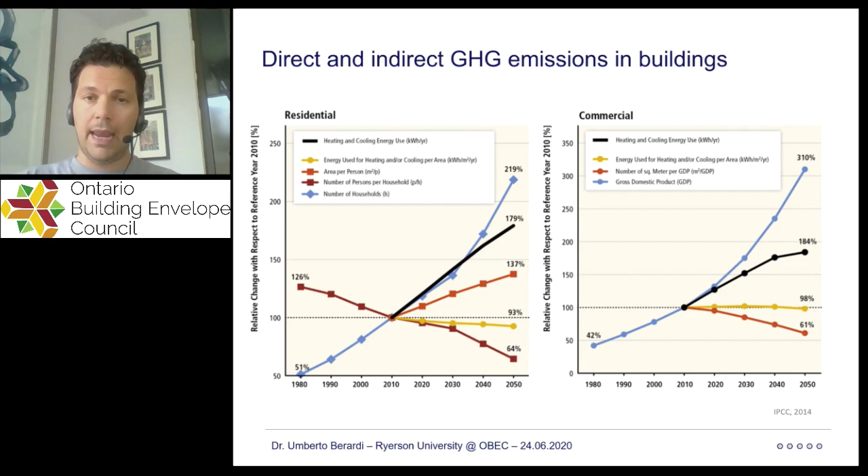It is a key imperative for building scientists to start understanding what we can do in order to behave and to act for building a better and more sustainable Toronto. Now, the huge majority of new towers that we daily see coming up in Toronto, across the entire Ontario and across the entire country, really offer us an opportunity to deliver a new way of constructing.

And today, I'm going to present you a bit of the sense of this scope, which is framed within my lab and within my group. The group is really a zero energy building group, and we often work on new materials. And today I'm going to present some of these new materials, and specifically speaking, I'm going to focus on some of the application of these new materials.

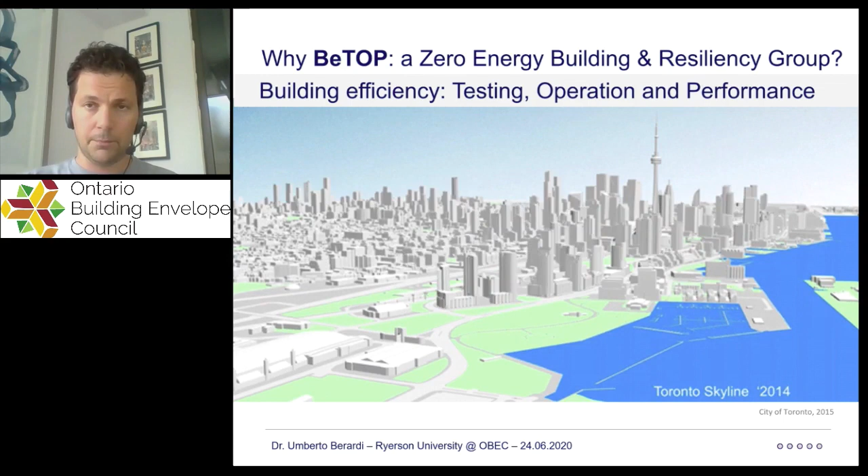So first of all, let me introduce you to the outline of today's talk. I'm going to speak about 5 different main categories of innovative products we can use in buildings. These 5 categories correspond to the 5 dots that you see at the bottom right of each slide. I'm going to start on phase change material, and I'm going to introduce the importance of building facades that have the capacity to accumulate some energy and have some thermal mass behaving action.

I'm going to then move into materials that have a very low thermal conductivity, and I'm going to introduce you to the world of super-insulating facades, which are not necessarily those facades that are 40 or 50 centimeters thick, that we often see in a lot of construction targeting sustainability, but are actually facades that in a couple of centimeters are able to guarantee an R value of 20, 30, if not more.

I will then move on to the world of new foams, and I'm using the foams to also introduce a key topic of today's talk, which is the embodied energy in building materials. Although it's not necessarily the focus of today's talk, I'm going to give you a snapshot of what it means for a material not only to be sustainable, but also to be able to be reproduced with a low embodied carbon.

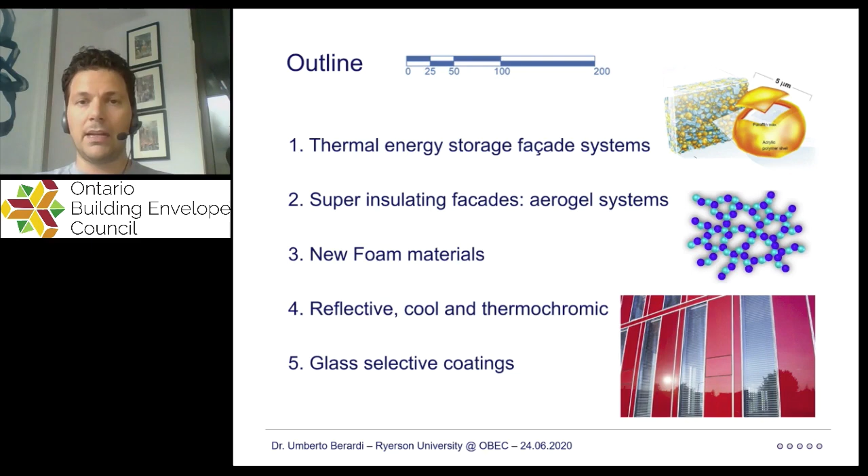Now, we all heard over the last few decades, if not even earlier, the critical importance of thermal mass. Some call it thermal capacity. The specific meaning of this is that we can have a building which is a lightweight construction and has oscillating temperature, as you see in this graph with the green wave that goes up and down, characterized by significant waves.

But if a building has a significant thermal mass, as you can see in this graph with the blue line, what you're able to achieve is an oscillation of internal temperature that is not really significant. And typically you also see a delay in the peak of maximum or minimum indoor temperature.

Now, from a strategic point of view, having a building with a high thermal mass is important, and it is particularly important in Canada, as well as worldwide. However, historically, building codes have not really paid almost any attention to thermal mass.

The construction sector has typically put in place codes that only target the R value, the thermal resistance of the enclosure, and have not necessarily given enough importance to the value that a facade with a given thermal mass may represent to avoid overheating in the middle of a summer heat wave, as well as the risk that we can suffer in the middle of a winter night.

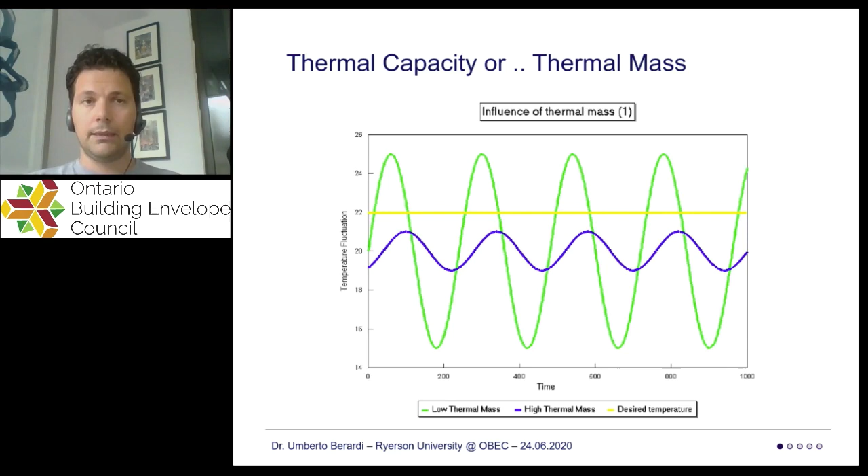Here we come in the sense that new materials may provide, without really giving you the weight of a brick wall or a concrete masonry unit wall, still the capacity to obtain a significant portion of thermal mass, so still a capacity to have thermal energy storage.

Now, if I want to characterize the possibility of a building, or in general a system, to accumulate energy, typically, historically, we are using sensible heat storage. This is the kind of heat storage that Casa Loma does in Toronto. You enter into a cathedral in Toronto and instantaneously feel that it's cool in the middle of a summer heat wave, because there is a huge thickness of stone that requires a lot of energy, and often a lot of time, before it can warm up.

If you do the same thing in a glass tower that we are building downtown, as soon as there is sunshine and you get into the mid of the day, internally you can easily reach 50 degrees Celsius if you don't turn on your air conditioning system. So sensible heat is an option, but clearly we can't build high-rise buildings with stones as in a cathedral—we can't afford the technology and cost of a meter-thick wall even with heavyweight construction. So a different approach is to use latent heat storage.

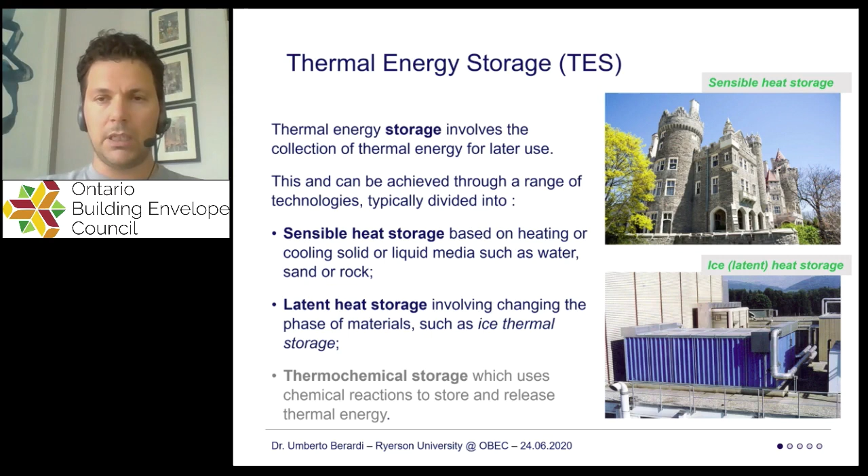The latent heat storage, often used in air conditioning systems—for example, those with ice storage—is basically a storage that uses the property of a material to change phase. This is actually the value of phase change material. Every single time we have an ice bucket and we require it to phase change from solid into liquid, or vice versa from liquid into solid, we really have a huge potential to store a huge amount of energy.

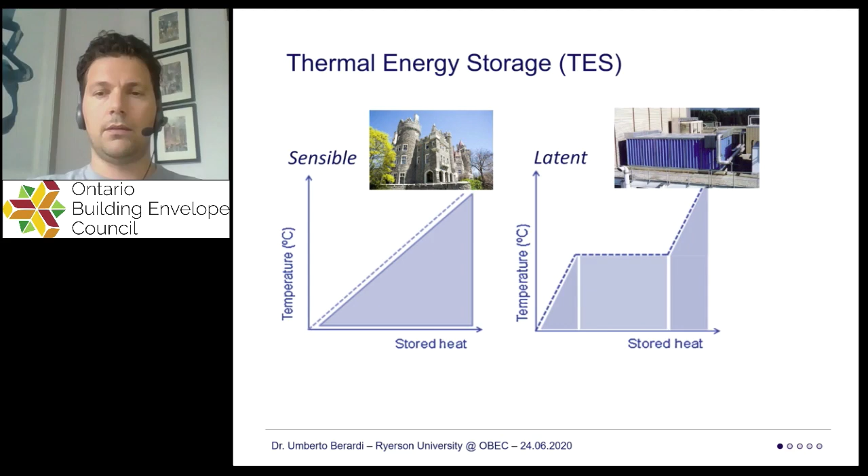I don't want to speak about the physics of the phenomenon, but if you follow me for one second and look at this glass of water with a bucket of ice getting into it, it's important to get the sense that the same energy needed for an ice pocket to melt is the same amount needed for the same amount of water to move from 0 to 80 degrees Celsius. This really gives you the value of why thermal storage is critical.

To break the bonds of a solid structure into a melted liquid structure, you really need to invest a huge amount of energy. And vice versa, if you want to solidify it back into that solid layer, you can really secure the potential of a huge thermal cooling energy storage.

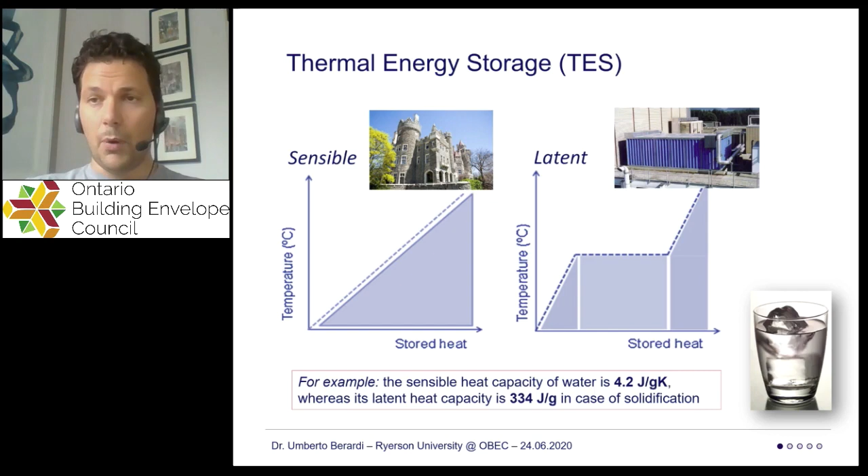This is possible with what we call phase change materials. Some of you may be curious about what they are—typically nothing more than a wax, or almost like water. We'll see in a moment that it's not really necessarily a pocket of water, but the principle is very similar to the material we typically use for candles. You have a material that is solid, and when it gets quite hot, it becomes liquid. This phase change is critical to act as a thermal storage with a huge thermal mass capacity for storing heat and avoiding our buildings becoming extremely hot.

Now, there are a couple of important aspects I need to remind you of. The first is that in the building sector, we want facades that are solid. Nobody is stupid enough to pretend that we want facades that can become liquid.

Phase change materials have always suffered the critical risk of being compartmentalized into plastic bags. Often in the past, in the 90s and early years of this century, people criticized these products because you could puncture these bags, and this could result in a leaking wall or a leaking false ceiling. But right now we have solved this problem, and I'm going to show you in a moment how.

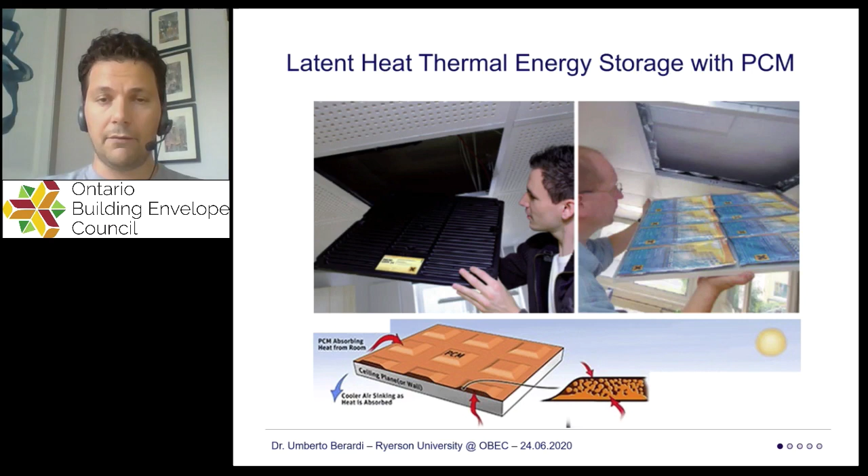The second element I want to make sure we're all familiar with is that although we often speak about phase change material using the singular word, in reality there are thousands of different PCMs. One critical element when it comes to thermal energy storage with PCM is to get a very good understanding of the different phase change materials you can adopt in your building facades. So let me introduce you to this huge family of products.

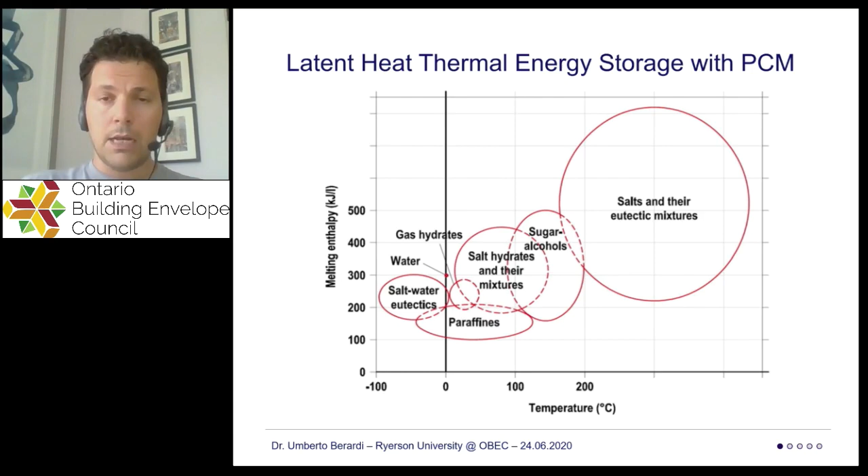Going back to the question about putting PCM in a plastic bag that can puncture and melt — the answer is no. I mentioned we discovered how to introduce PCM into buildings, and the process that is currently most common and best for delivery is by microencapsulating this PCM in a polymer shell.

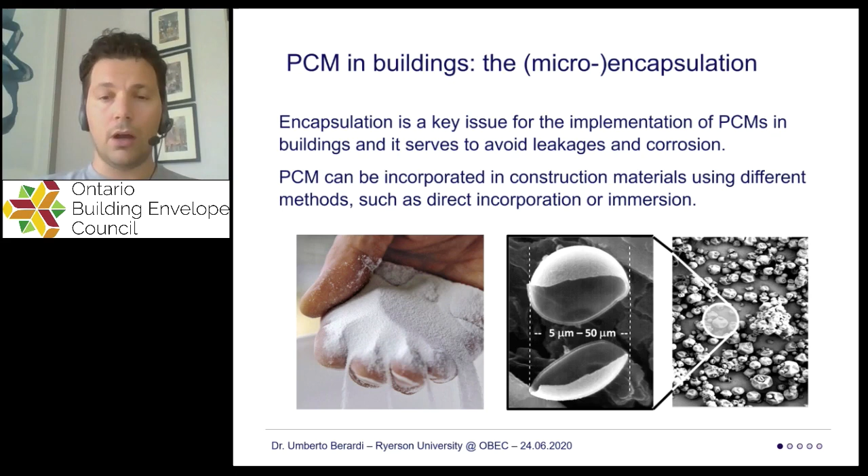So typically on the market you can find a lot of powders of PCM that are really surrounded by a polymer. At the end of the day, you're using nothing more than something that looks like sand. But if you zoom in with a microscope, this granular powder is really encapsulating a PCM in the middle. So the PCM can melt and solidify, and this process accumulates or releases energy, meanwhile stabilizing the internal temperature in the building, acting as your thermal battery — although it's lightweight and doesn't really increase the weight of your facade too much.

Now, these powders can clearly be made with a lot of different PCMs, so selecting the right PCM is critical. We've also been seeing a lot of new powders and new building products coming onto the market, as well as first attempts at monitoring thermal energy systems in some real buildings. I'm going to show you a few of these options in a moment.

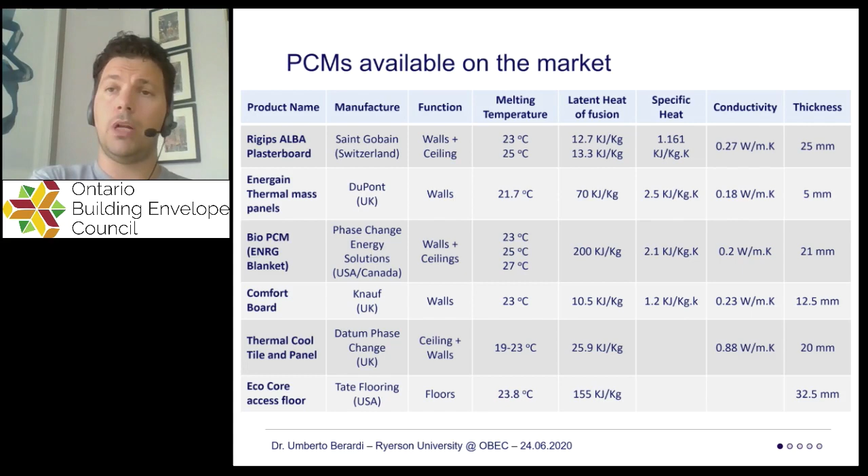But it's still better than nothing, and it's still a way to give a lightweight element in our building facades, such as a gypsum board, a thermal function - basically stabilizing the indoor temperature of your building. You may also start seeing in the fourth column that a critical factor is the melting temperature. I've selected products in this table with a melting temperature between 20 and 27 degrees, and there's a lot to say about why these are critical and useful temperatures. I'll show in a moment why these are typical temperatures we use.

Let me first give you another snapshot of the possibility to use PCMs in buildings, not only as a gypsum board, but also for concrete tiles or ceramic tiles in your flooring.

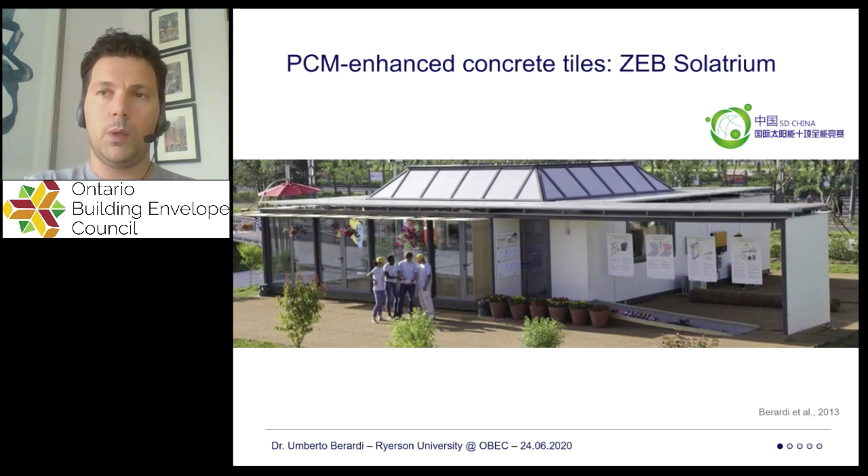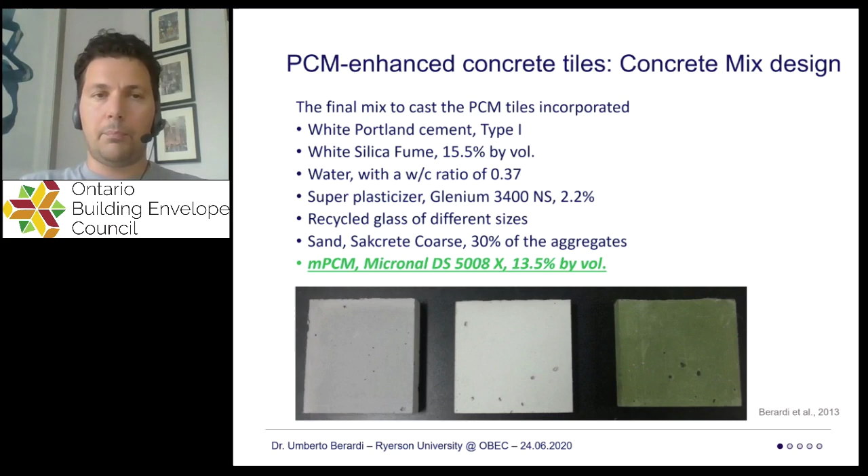The value of the PCM was in shifting the amount of solar energy entering the house, moving the maximum peak temperature from the middle of the day towards the night, where night cooling with a bit of cross ventilation was enough to cool down our house completely, passively.

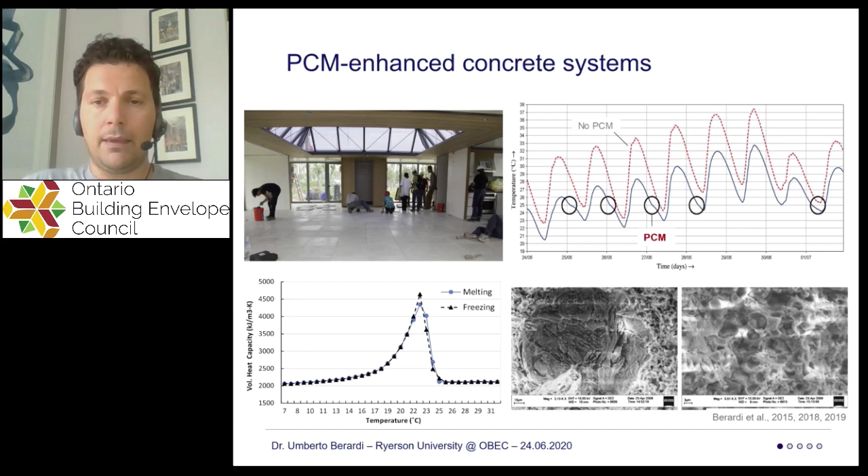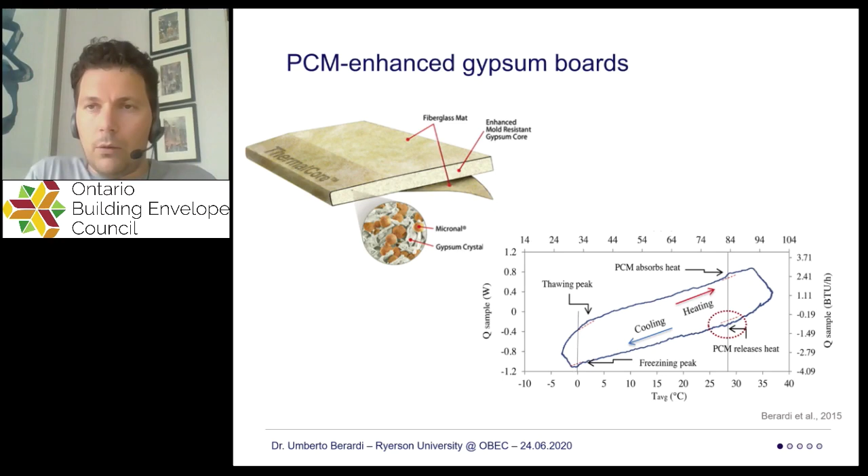Going back to those gypsum boards with PCM in the middle, they actually have value even for retrofitting applications, increasing the thermal capacity of an existing building by installing gypsum board with PCM. Here's a project done with a developer in Toronto three years ago, where we started monitoring units in one of his towers, installing this gypsum board with PCM in different units for different orientations, and using side-by-side units to do a comparative assessment of indoor conditions without any air conditioning system.

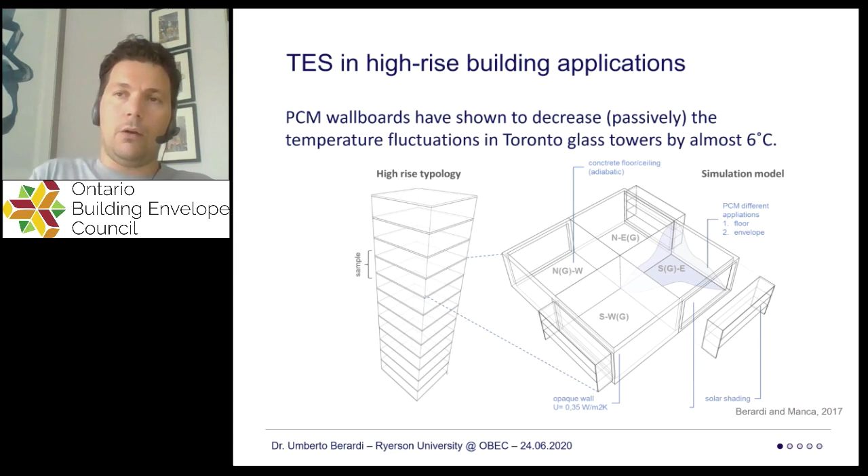Here you see a bit of the results, and I'm not going to go too much into detail - at the bottom right is the link to the paper published in 2017 with all these results. But basically for Toronto, a condition significant for us, we were able to obtain results that guaranteed a cut in energy demand oscillating anywhere from 12-13% up to 23%, and in some cases up to 30%, compared to the baseline without these gypsum boards.

A critical element I want to stress is that the orientation of the facades and a few other configurations are critical when it comes to these material-science-based materials. So they're not easy materials to use, but they can be particularly useful.

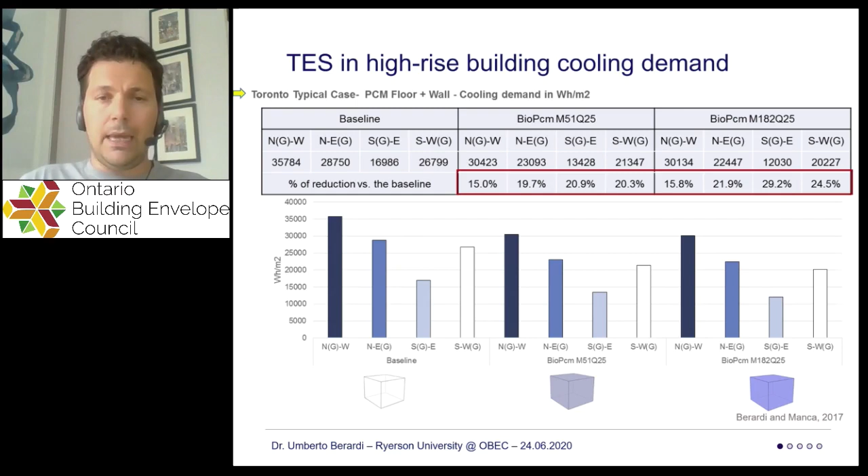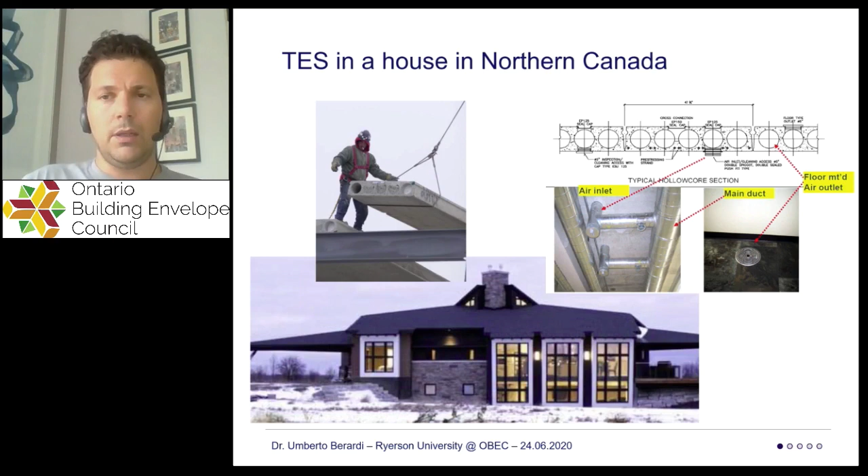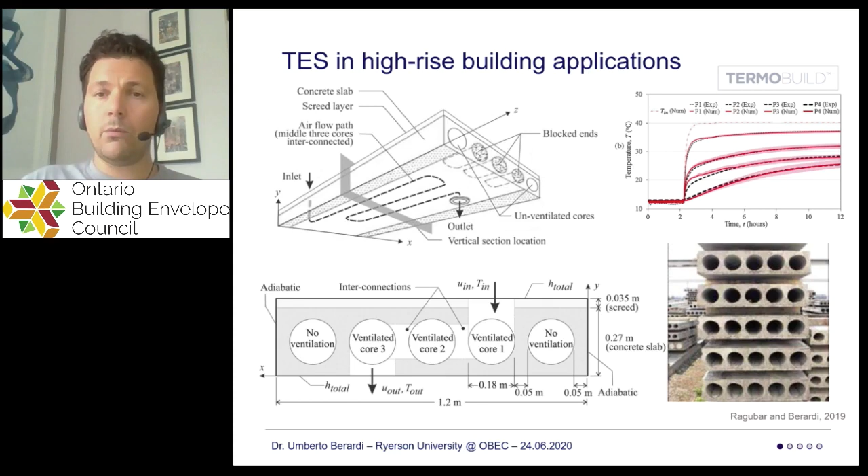Now, in this particular building, later on, we actually tried to do some research. More recently, with a local company, we've been coming up with a system that uses concrete blocks enhanced with PCMs, to give not just structural value to these elements but also a huge thermal battery capacity.

I told you before to pay attention to the temperature, and the reason is that PCM undergoes phase change transition, but it's critical to understand at which set point we typically use our thermostat. A good starting point for saving energy is having different set points for heating and cooling: cooling season temperature set point in the range of 24 to 27 degrees, and heating season from 20 to 22 degrees Celsius.

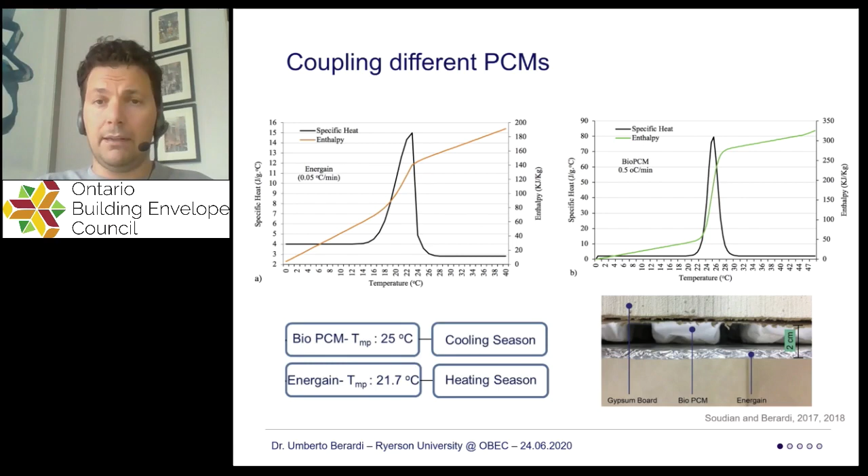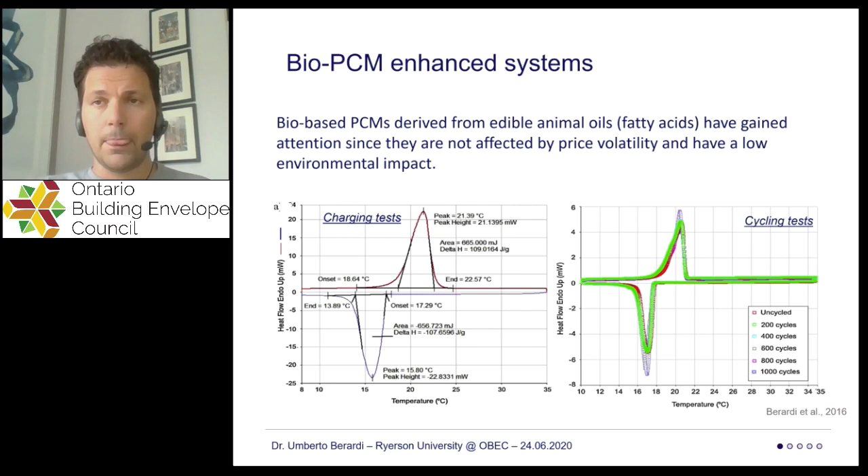So specifically, we've been working on coupling different PCMs, making sure we can use some PCM more effectively in summer and some more effectively in winter. We worked on bio PCM, which are quite common these days in North America because they have very low embodied carbon energy. They're basically waste from other industries, typically pork industry and other animal oil industries, and they have quite good properties for storing energy, so there's huge potential in these products. We've also been working with new nano PCMs, more technical and not yet close to market, but keep an eye out because in a few years these could become very popular materials.

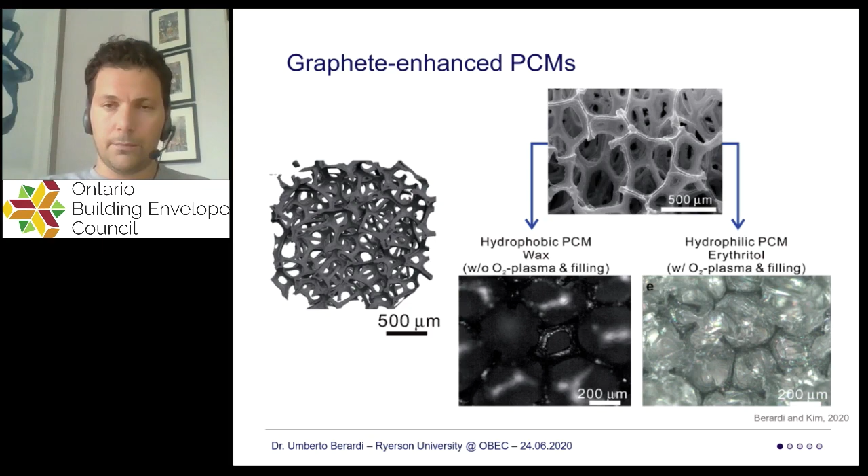Now, focusing on the second point of today's talk, since we only have one hour, I want to start introducing you to the world of super insulating materials. I started today's talk by saying that, unfortunately or fortunately, building codes have often put all the attention on the R value of facades, and not a lot of attention on the thermal capacity or thermal mass behavior of our facades.

So when it comes to the R value of our facades, we've seen over the last almost 50 years, since 1973 and the following codes after the crisis, that building codes have pushed us to design buildings with an R value that is bigger and bigger. One approach to address this challenge is by putting in thicker insulating layers.

While this is an option, and for some applications can be a good one, especially for an isolated construction where the thickness of the wall isn't critical, it's definitely not an option when you're designing a high-rise building in the middle of a metropolitan city. You cannot really afford the challenge of having very thick layers of insulating element.

So luckily, we have new products typically under the category of super insulating materials. I'm going to specifically speak today of aerogel, but there are also vacuum insulating panels becoming more and more common in the building sector, which often give us the opportunity to have very low thermal conductivity - materials with a thermal conductivity of about 0.01. That's a quarter of the thermal conductivity of fiberglass, meaning you can achieve the same thermal effect with a fraction of the insulation thickness you'd need using a mineral material.

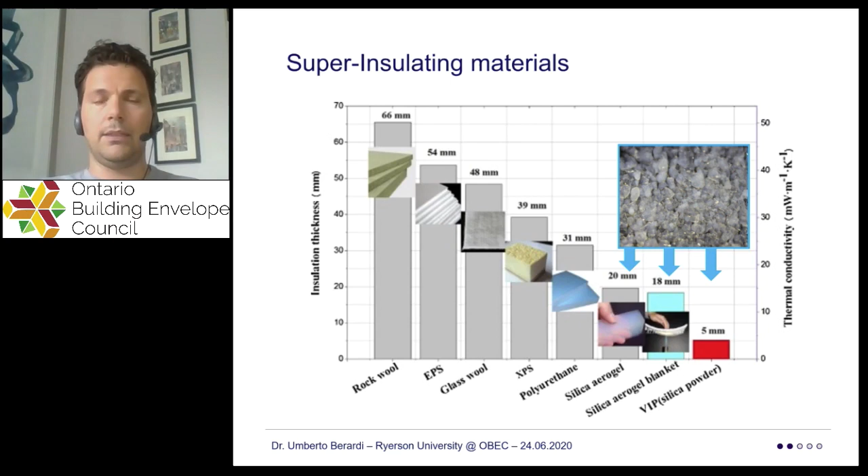But clearly, this new potential and these new materials still have some challenges that I'm going to present to you today. So what is an aerogel?

An aerogel is basically a material in which you try to eliminate all the liquid portion from a gel. They're often described as frozen smoke because in reality they look like frozen smoke. These are very lightweight materials - they only weigh a few kilos for an entire cubic meter. They have 95, 98, sometimes 99 percent voids, and a low thermal conductivity of only 0.01.

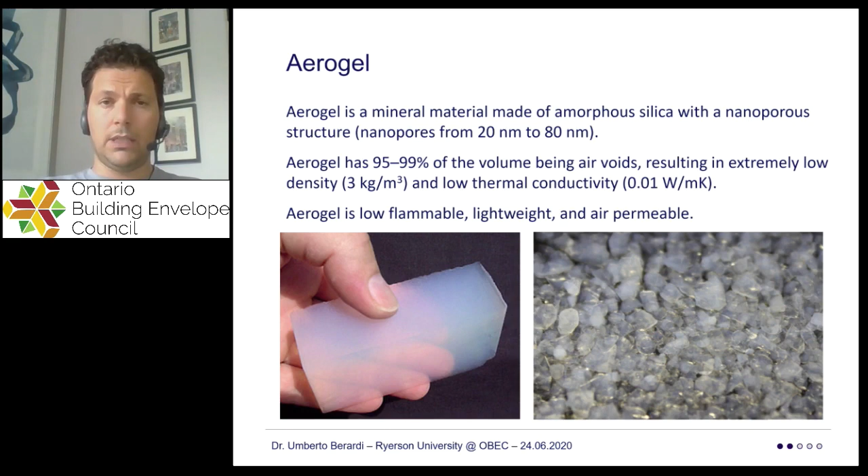So how do you typically obtain these characteristics? Through a chemistry process, which unfortunately makes this product quite expensive. This process starts from a silica gel, very similar to the gel you may be using in your hair.

So although we speak about a void, in reality we have molecules of air. Even in a closed cell foam, you still have a blowing agent present as a gas, and this gas moves around, carrying heat from one side of the material to the other.

Although we typically consider an insulating product fully solid, with thermal conductivity acting only through conduction, in reality within the cavities and voids of these products, convection is happening. And if the void is big, convection becomes more significant.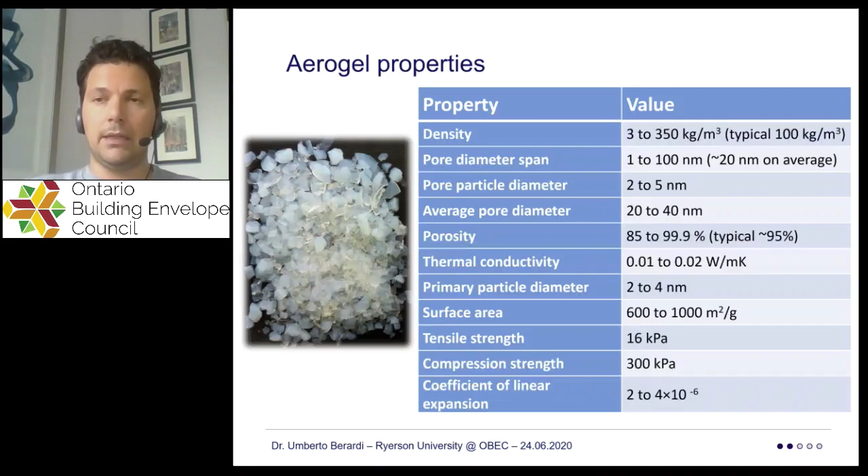Now, if you take this aerogel - and I showed you previously some of these aerogel particles - you can put these aerogel granules into any material typically used in building construction, like cement-based mortar or concrete. It's not necessarily an easy approach, because you're using a material with a still quite high cost into a material that generally has low cost, and you're putting a super insulating material into concrete, which isn't designed to have very low thermal conductivity.

But it is a good option moving forward - imagine that in the years to come we can start having concretes that also have low thermal conductivity. To be honest, we have already created concrete blocks with thermal conductivity in the range of 0.08, using mixes of aerogel and concrete.

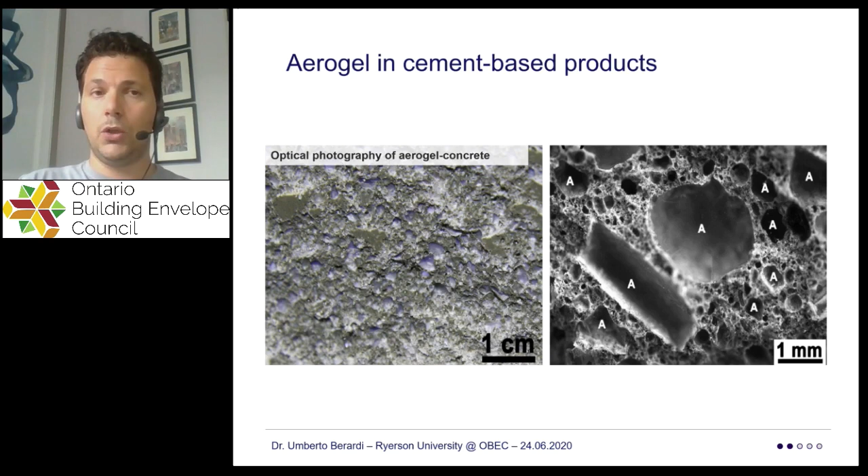More importantly are the opportunities to use gypsum boards with aerogel, blankets with aerogel, or plasters with aerogel. These are all products that can be created with thermal conductivity below 0.02 - values significantly lower than fiberglass - and they can be effective and useful in many different applications.

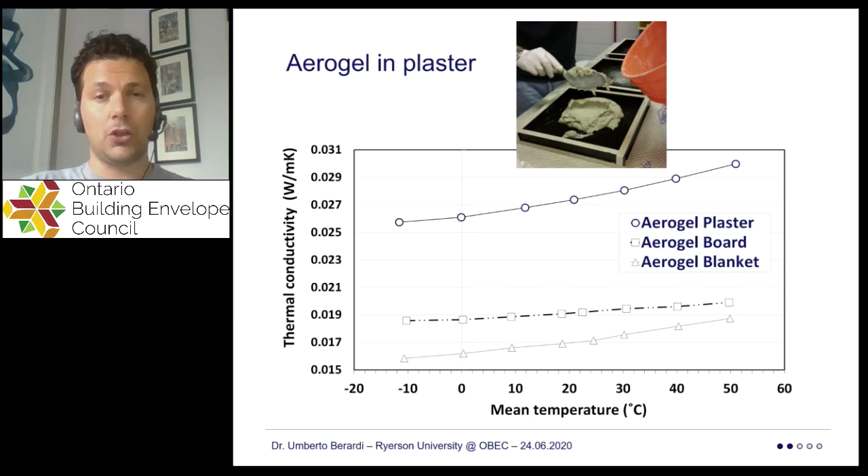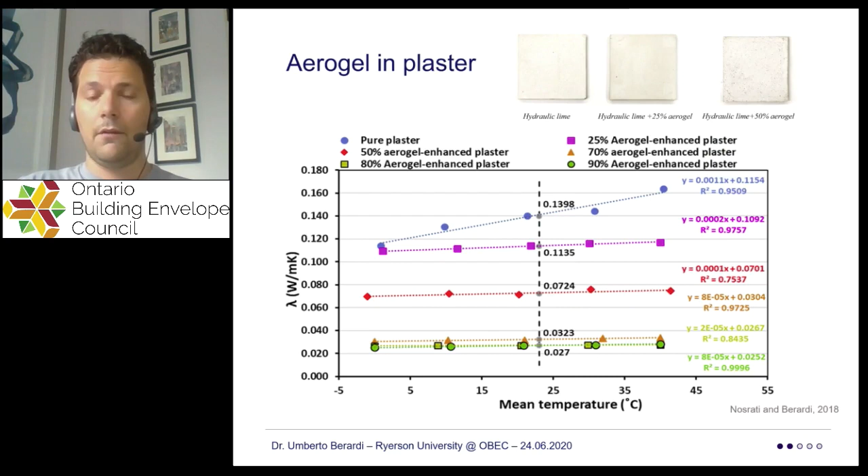They don't suffer a lot of aging, thanks to the fact that aerogel is typically water repellent. They also have good behavior when it comes to not getting wet easily, so hydrothermally they are good products.

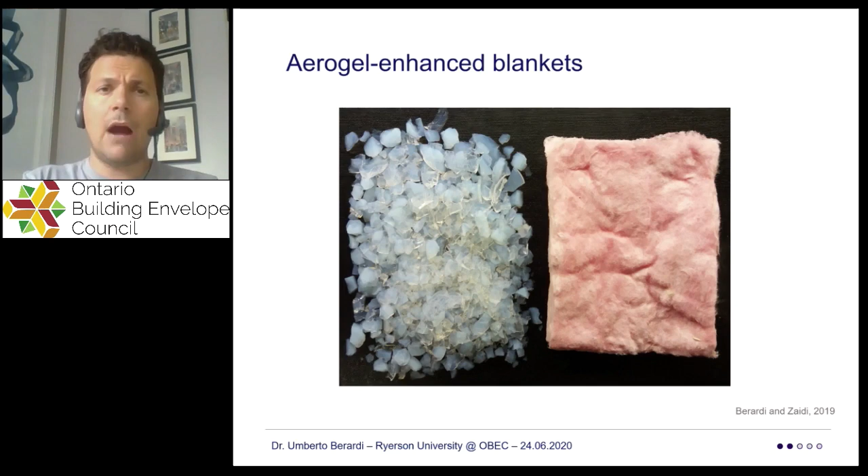In fact, aerogel-enhanced blankets have started becoming more and more common, for example, for protecting thermal bridges in specific construction typologies. What is an aerogel-enhanced blanket? It's basically a normal blanket, like fiberglass or any fiber material, into which the aerogel was put while still liquid, and then the liquid portion is evacuated.

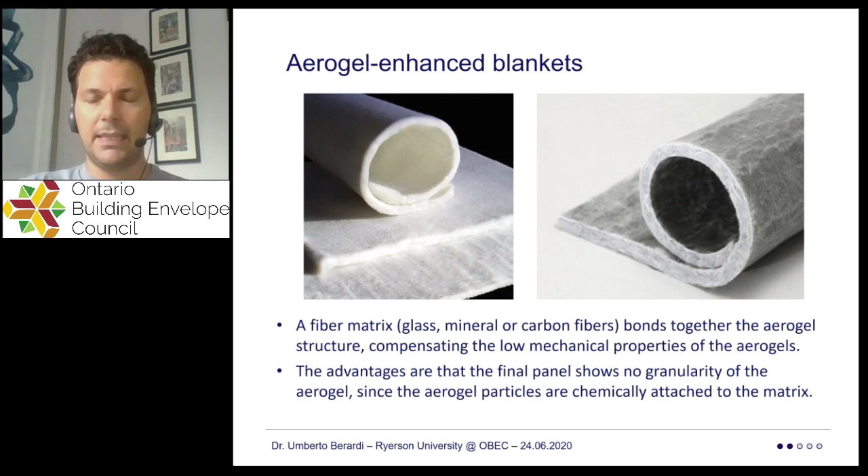And so the structure of the aerogel gets basically trapped within the bonds of the fibers.

These products are available on the market and produced by a lot of different companies - here you see some of them. More companies have started producing these products; some come from startups, others from more well-established companies. But one important characteristic of all these products is that their thermal conductivity is often not too far from 0.01 watt per meter Kelvin.

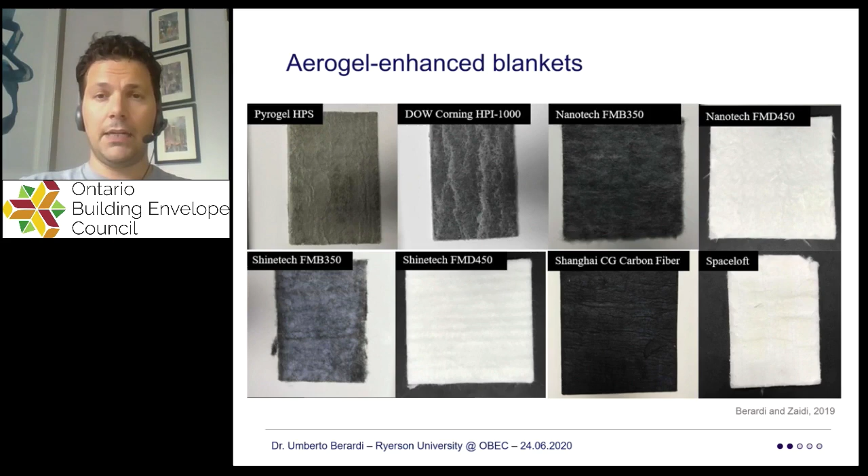So they have very good thermal behavior, and we've been testing this kind of material property in our lab. I need to confess that for some of these products, we found results that were basically higher than what those companies were declaring in the technical sheet. But without questioning that, these products have very low thermal conductivity compared to a lot of other products, and they are produced and sold as tiny layers of 1 centimeter, 5 millimeters, or 20 millimeters.

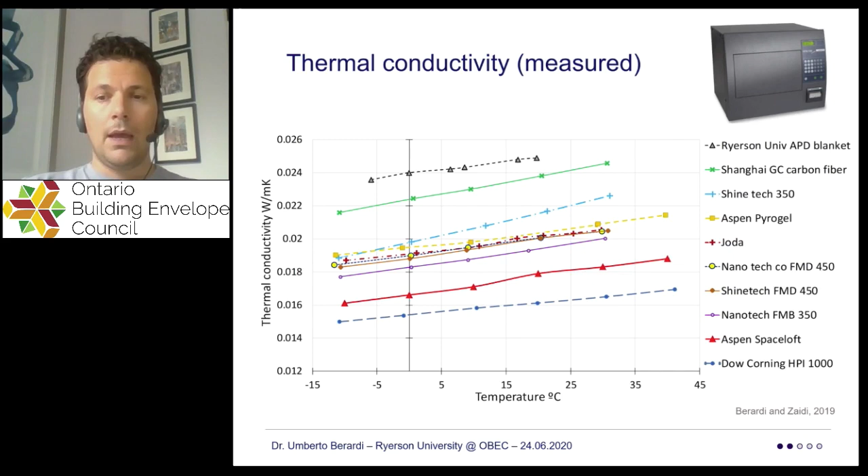You can use these layers a lot, for example, for protecting thermal bridges. As a matter of fact, just to give you an example, last year a student of mine performed some modeling of a lot of typical thermal bridge risks and issues in both concrete and steel construction.

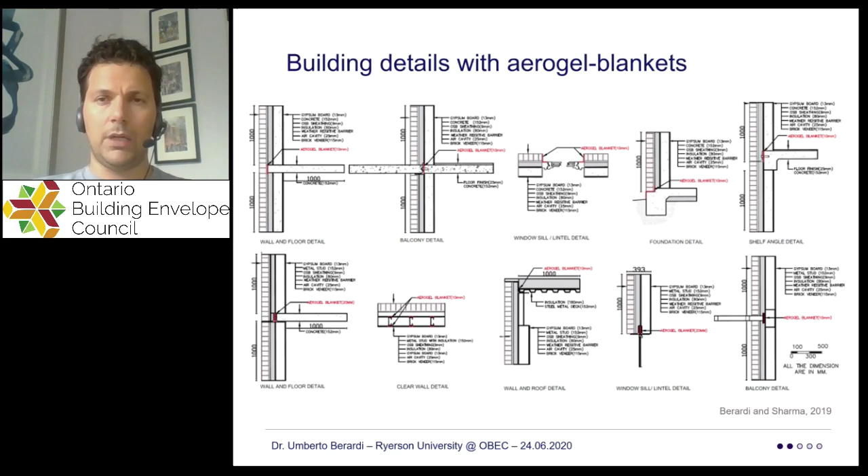And if you are interested in seeing some of the results, there is an article in the OBEC publication of last spring that really shows all the building details with aerogel blanket protection and without the aerogel blanket protection. So you can see, for example, a concrete balcony detail: by simply putting a 1 centimeter thick aerogel blanket, it avoids the traditional effects of the concrete balcony.

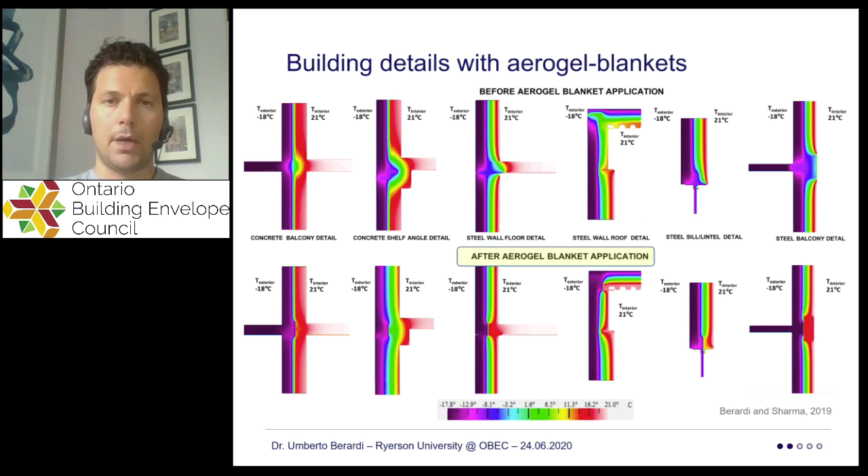Similarly, a concrete shelf angle detail will be resolved very nicely once you start protecting that kind of concrete element with an aerogel blanket, and so on and so forth. I don't have time to go into the details, but you have plenty of opportunity if you go to this Pushing the Envelope Spring 2019 issue to get a sense of the opportunity that aerogel blankets provide to us.

And specifically, we also used that opportunity to run some simulations of the potential value of extensively used aerogel blankets for protecting all the thermal bridges existing in both concrete and steel buildings across Canada, across different zones from zone 5, 6 to 7. And you can see that there are significant energy savings that in some cases can reach up to 20, 30 kilowatt hours per square meter by protecting all the thermal bridges with aerogel blanket.

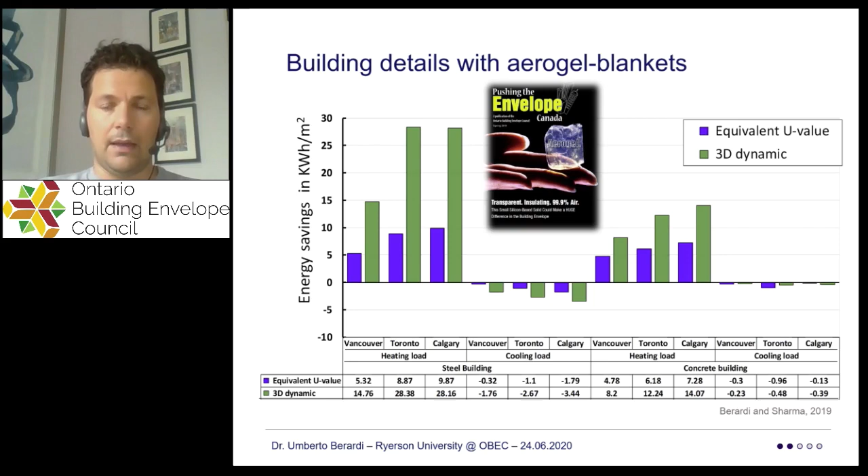So clearly, in order to push our facades, our envelope, to really promote the possibility for our enclosure to become fully a part of a desired trajectory towards zero energy buildings, these options represent a significant additional value for building facades.

Now, aerogels have been used not only for blankets or for plastics or concrete, but also, for example, in window systems. They've been used both within glass units, so in the real transparent portion of the window, as well as recently in the frame. And we all understand that the frame is still the most critical part we have to face when it comes to high performance windows or curtain wall.

Because at the end of the day, we can put in a triple or quadruple glazing window, but in reality, a lot of these windows are still supported by frames whose thermal conductivity remains quite high because they're often metal based. So aerogel in the cavity of a traditional curtain wall can represent a good option to cut significantly the thermal conductance of the frame. And here, in fact, you see some of these products.

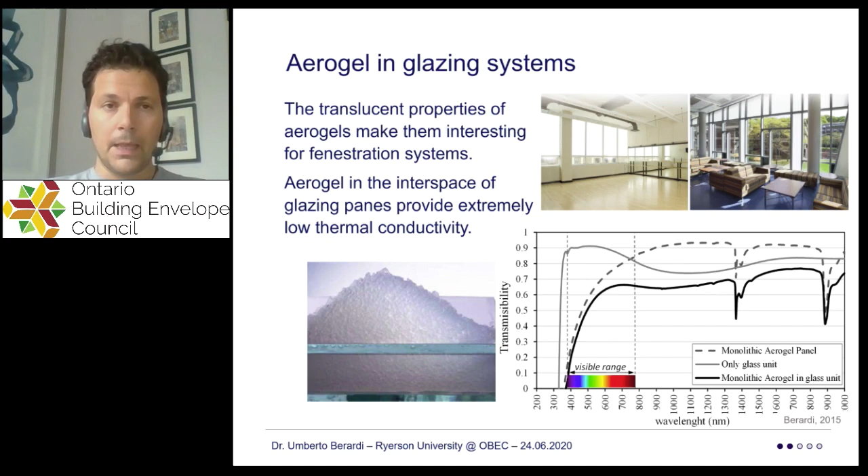Again, no time to go into the details. Plus, there are new products currently on the market since I put together this table. But I want to show you this to give you the sense that we have some products that have already started introducing aerogel in glazing systems. They're not really common in our country yet, but they're definitely a topic to be focused on, specifically because we are still looking at construction with a huge portion of transparent enclosure or curtain wall facade design.

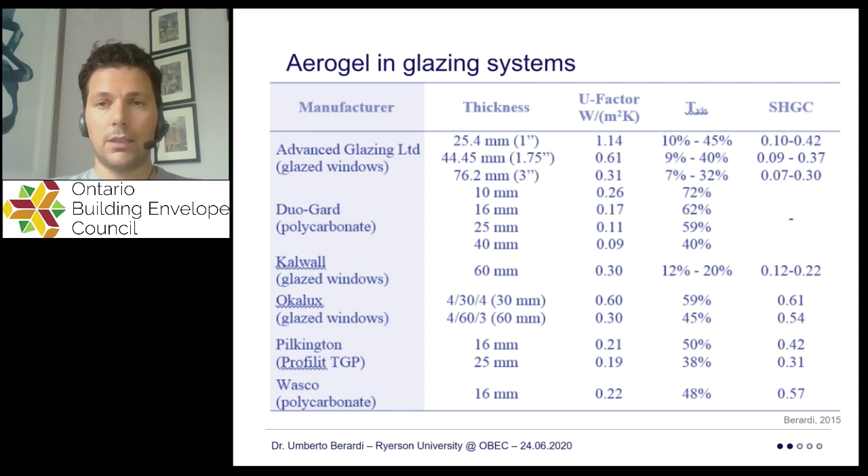Now I'm going to move into the third part of today's presentation. I'm going to speak about new foams for building facades. Indirectly, I started the discussion of this topic last month at the webinar when we were speaking about the importance of effective thermal conductivity behaviors in real facades. And I was speaking, if you were part of that seminar, about the implications that, for example, different temperature or different relative humidity may have on the final effective thermal conductivity of our insulating products.

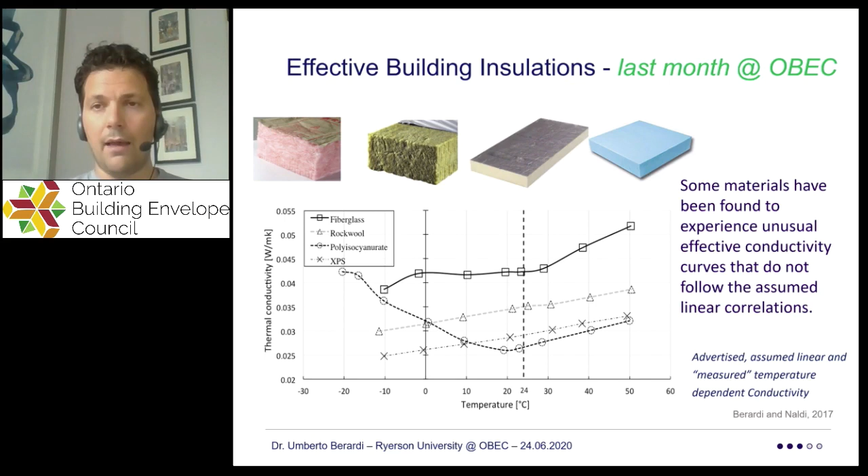Today, I'm going to specifically focus on foams, and the reason is that foams represent a good compromise these days between a traditional insulating product and a super insulating material such as aerogel or VIP. They often have a thermal conductivity certified with a value below 0.03 W/m·K. Sometimes they almost approach 0.02, or at least 0.025 W/m·K. So foams have really good potential for some specific aspects.

But we also understand that they've often been claimed to be materials with high embodied carbon, and they have often been accused of being materials that are not really sustainable. So today I'm going to give you a snapshot of the fact that this statement is probably not fully correct, or in other words, it is a bit out of date. It is true that in the past, foams were often produced with materials that have some environmental issues, but it's not necessarily true for all the products that we currently have on the market.

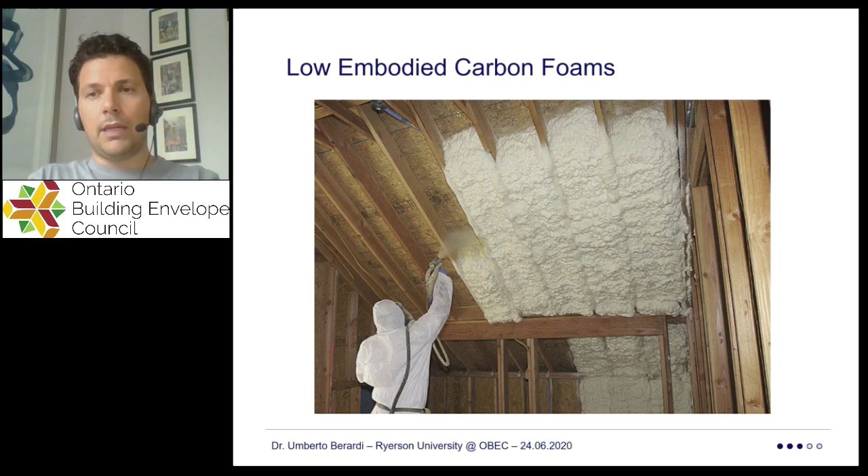As a matter of fact, and I apologize for this long text that you can read at the end of the talk, what I want actually to certify to you, being in the world of research for a good amount of years, is that foams have changed quite a lot over the last 2 or 3 decades.

After the Montreal Protocol, they were accused as materials that had a huge ozone depletion potential. The reason being is that they were produced with a blowing agent that with time was escaping the foam matrix, and it was eventually responsible for the risk that our ozone protection layer had for many years. Now, a lot of these foams, if not all of them, have almost moved to zero ozone depletion potential. So the ODP of new foams is pretty low.

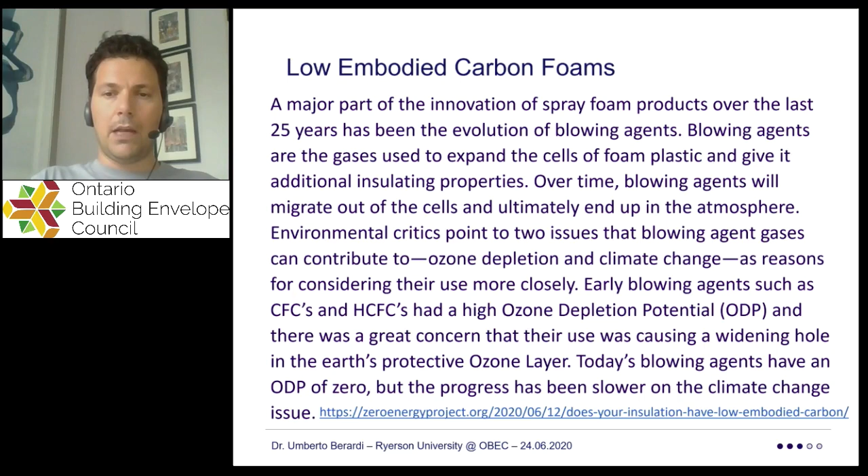But sometimes people do not really pay attention to the fact that some of the foams of a few years back still had a significant greenhouse gas emission factor. They were still not really highly sustainable. They still have some level of high embodied carbon. And so the industry over the last few decades has been pushing not only to make sure that the ozone risk was resolved, but also that the greenhouse gas emission factor of the production of these foams was resolved.

As proof of that, they moved from the first generation of CFC, chlorofluorocarbon blowing agents, into the second generation with HCFC, and more recently they moved into HFC, hydrofluorocarbon blowing agents. And a lot of new foam companies and products are already up to speed to present products with the 4th generation of blowing agent. So they use hydrofluoroolefins, HFO kinds of blowing agents, new blowing agents that typically have a much lower embodied carbon.

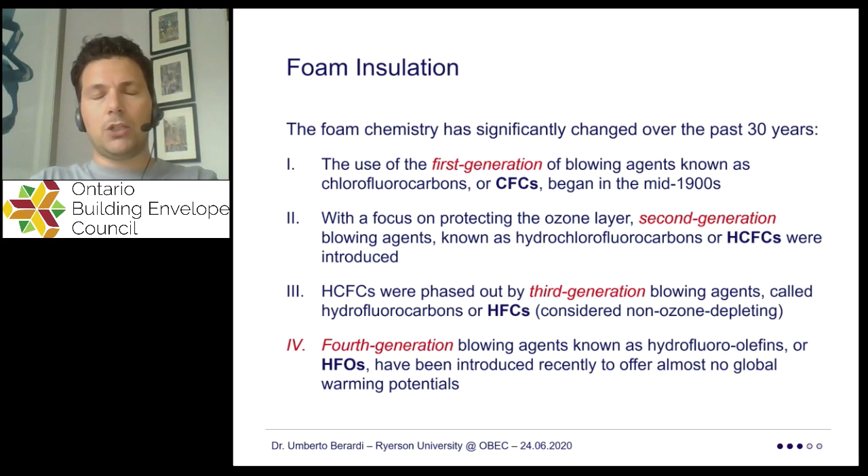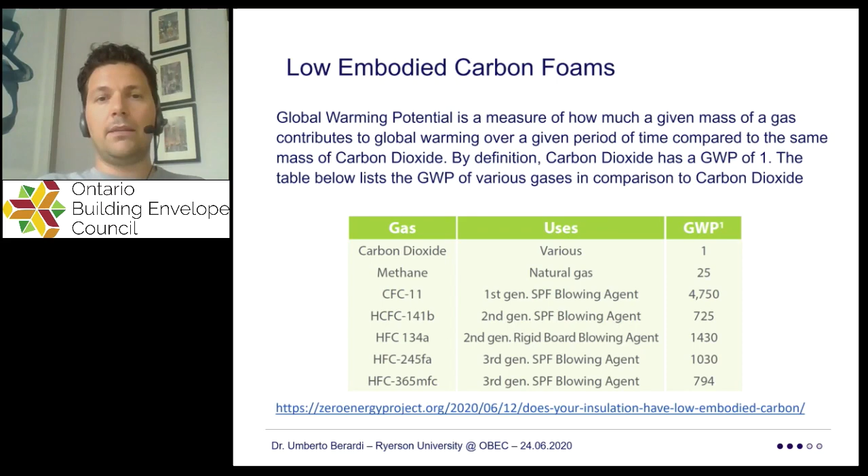And we also start seeing materials that, since they use CO2, carbon dioxide, as a blowing agent, literally have a global warming potential of 1. I remind you, if you're not really familiar with this coefficient, that the GWP is basically a benchmark metric that compares the greenhouse gas emission risk with traditional carbon dioxide. So if you use carbon dioxide as a blowing agent, you are basically the benchmark yourself, and the GWP of some of these products is basically equal to 1. So we already have low embodied carbon foams.

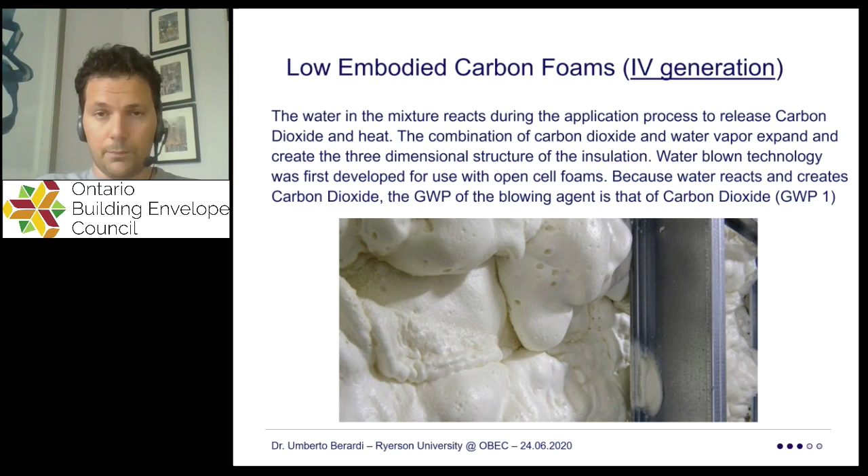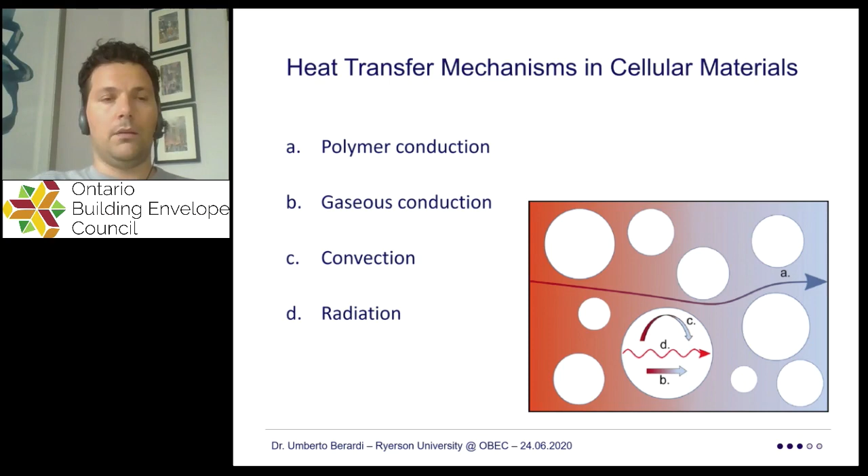It is our responsibility as building scientists and as professionals in the facade building system world to start pushing for higher adoption of these products. And the value of these products is also that they have solved, or almost solved, a lot of the troubles, as I was mentioning last month, of effective thermal conductivity being different from the nominal thermal conductivity on the technical sheet. The reason being is that these materials have aging risks that are quite lower than the first CFC blowing agent foams, since a lot of these closed cell foams do not have a significant risk of the blowing agent escaping from the foam in the same amount we were used to in the past.

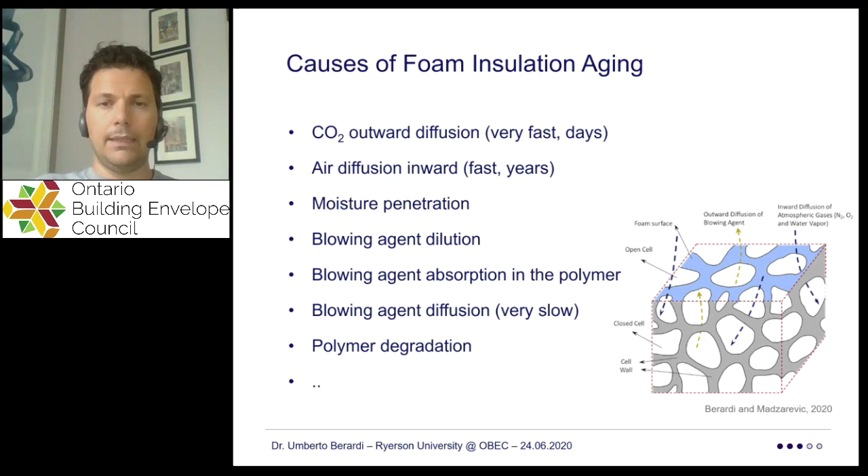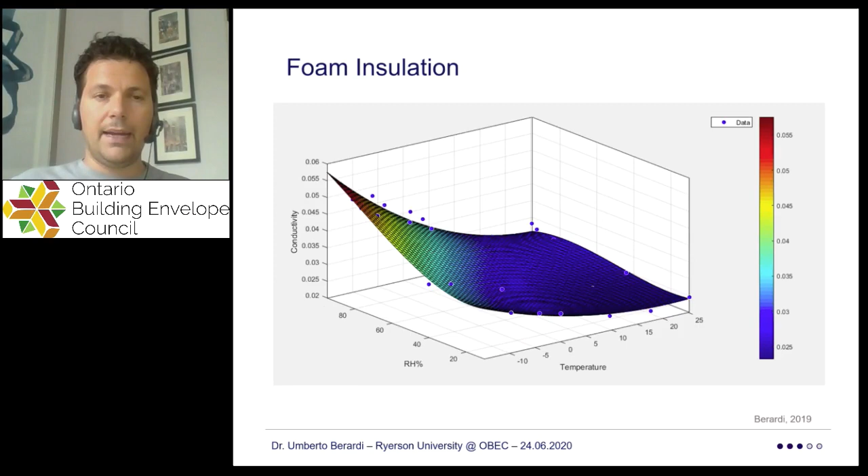I don't want to spend too much time today, but if you go back to last month's seminar, or you read some of the papers you always see at the bottom right of my screen, there are some papers we've done to prove that even when you take into account the effective thermal conductivity of some of these foams, the real behavior of the material is quite consistent and quite similar to the nominal value. They still need to be carefully considered, especially when used in outdoor conditions at extremely low temperature, and when they are polyisocyanurate products. But clearly, this is a topic for another talk and not for today's talk.

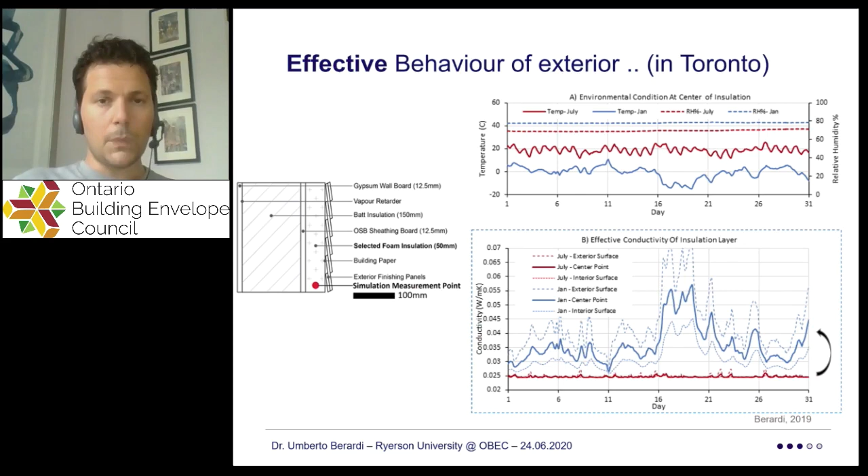I'm going to move now towards the fourth pillar of today's talk, which is the topic of coatings, cool materials, and reflective facade elements. Now, we are all familiar with the implications of climate change.

We're also all familiar more and more with the implication of the risk of a microclimate in our cities that is quite different from the climate that we had outside the downtown core of the city. And we often speak about the urban heat island effect as the merge of all these kind of microclimate implied effects that we can see in the downtown core of a large city.

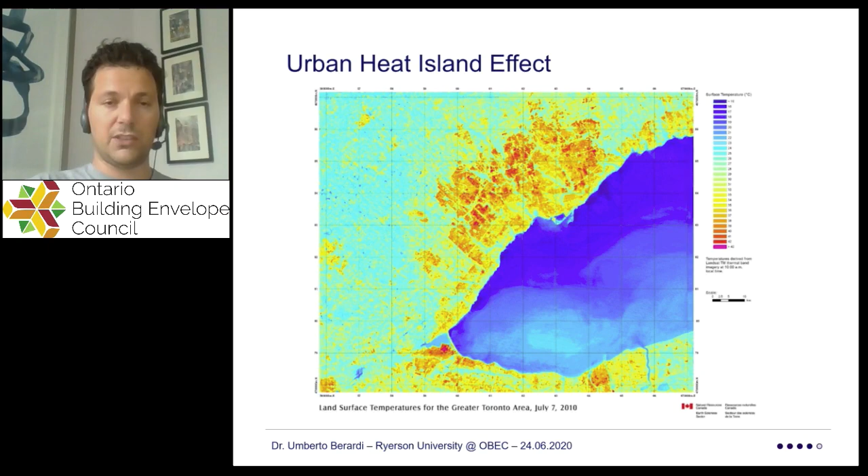And in order to face this kind of challenge, more and more often we start seeing the value of cool materials. Now, historically, I would say this wasn't really a topic for Ontario, because historically cool coatings, reflective coatings, have been a significant portion of attention in cooling dominated climates, and so clearly not in Ontario, that is a heating dominated climate, or at least used to be only a heating dominated climate.

But the more we start facing the challenge of climate change, the more we start facing the risk of overheating inside our buildings, the more we start seeing the implication of heat waves in a country and for a population that is not used to heat waves, the more even building codes have started pushing cool coatings. And we're all familiar with the Tier 2, for example, in Toronto, and the implied request of a cool coating or a high-albedo coating for our roofs.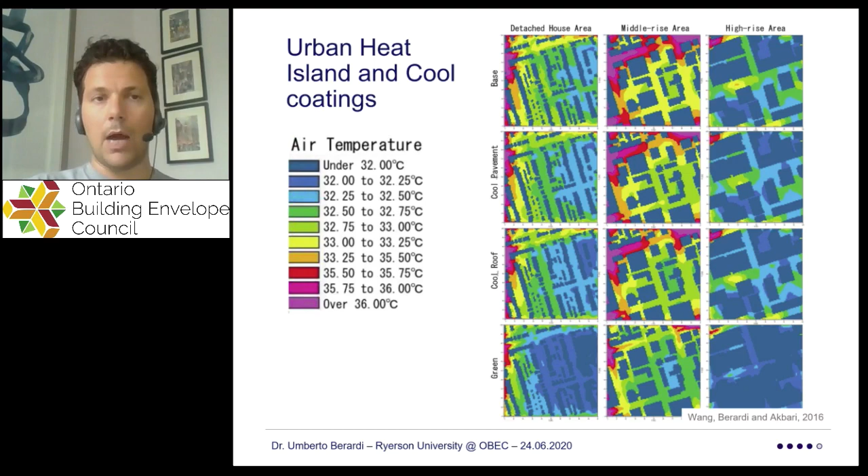And we are not in a Greek town, and we are not yet used to facades that are fully white. But we have understood that, specifically speaking, cool materials may provide a good value to reflect back towards the sky the extra solar energy that may heat our facade. It may increase the temperature of our facade in the middle of the summer, and we may not be desiring that kind of effect.

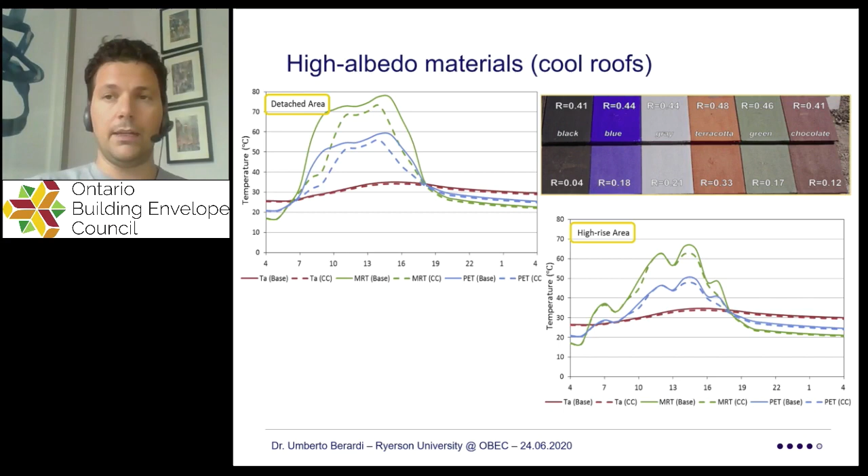Now, first of all, you need to be aware of the fact that material science these days is able to propose to you cool materials that are not necessarily white, and is able to propose cool materials that may be of any color you may desire. Here you see, for example, in the top right side of the screen, some material with an albedo, so with a ratio of the energy that gets reflected and gets absorbed, that is different from the top and the bottom line of the materials, although the colors are very similar, and although a lot of those materials are not really super white.

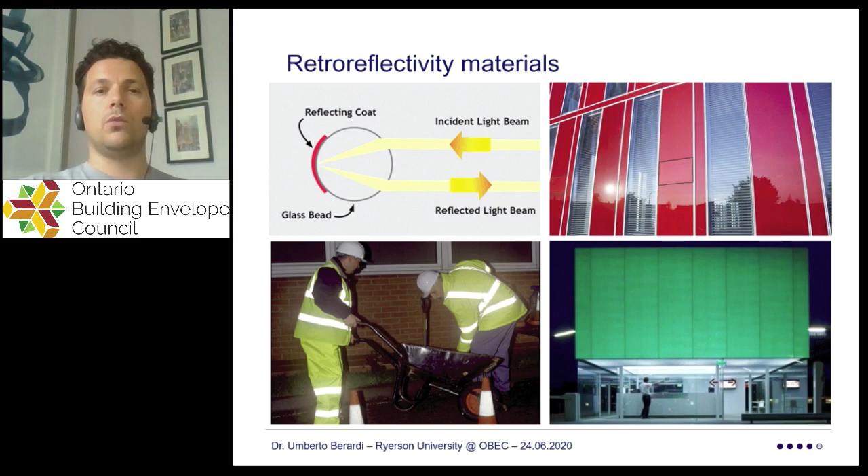And in fact, we have been seeing these days a lot of new reflecting materials and also a lot of retroreflecting materials. So materials that not only reflect outside the energy that is arriving, but reflect with the same direction of the incoming light. So instead of reflecting against the opposite building, and instead of risking that the opposite building across the street is getting all that energy, new coatings have been able to use material science nanospheres in order to retroreflect that energy back into the sky.

Now, just to show you what that means, it means that basically, in a downtown condition in which two buildings face one against the other, instead of reflecting back against the street, and so getting more energy at the street level, or reflecting against the opposite building, these materials are able to reflect back towards the sky.

Now, clearly, retroreflectivity is more valuable for facades, while cool materials are fine often for all roofing applications, and they are still a question of discussion for Canada, to be honest with you, because you really lose the gain that solar energy would have eventually been able to provide to you in the middle of the winter.

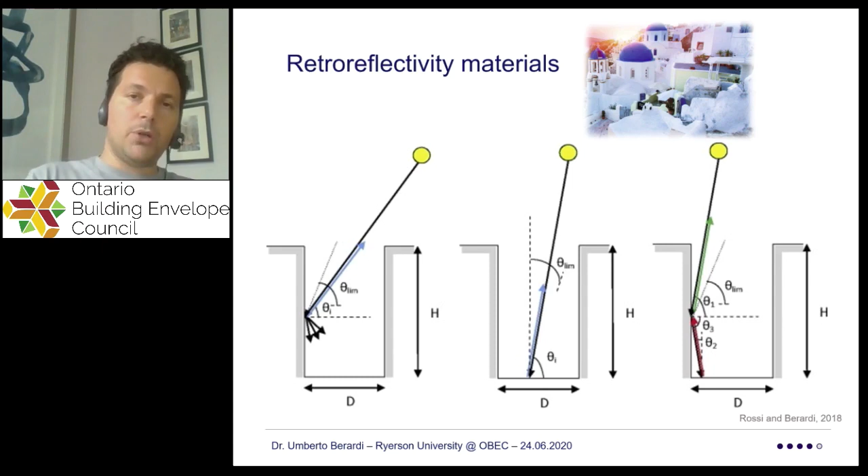Now, one opportunity, instead of using retroreflecting materials, is these days the challenge and the opportunity of using thermochromic materials, or materials that have an albedo that changes depending on the temperature. What that means is that you can have products that have two effects. They typically have an albedo that is higher at higher temperature. So in the middle of the summer, when the facade becomes hot, the material becomes reflective. But when the material is cold in the middle of the winter, the material still retains all the energy that is arriving from the sun.

It is more or less the same principle that we use in thermochromic windows, or that we have been using for almost decades so far in transition glasses. So the fact that the material can change the transmissivity according to other factors is a potential huge value for dynamic facade design that we haven't yet fully explored.

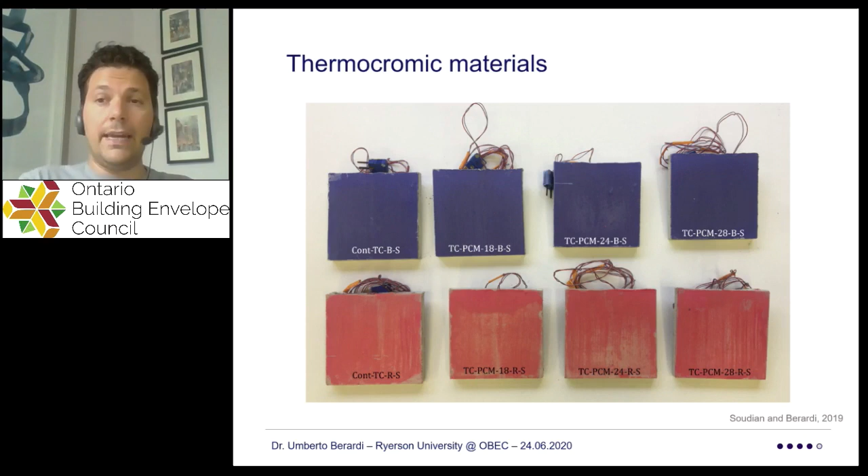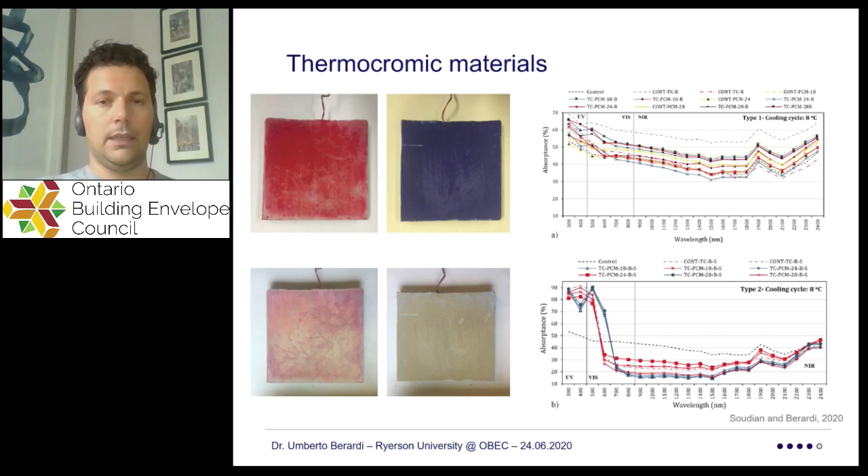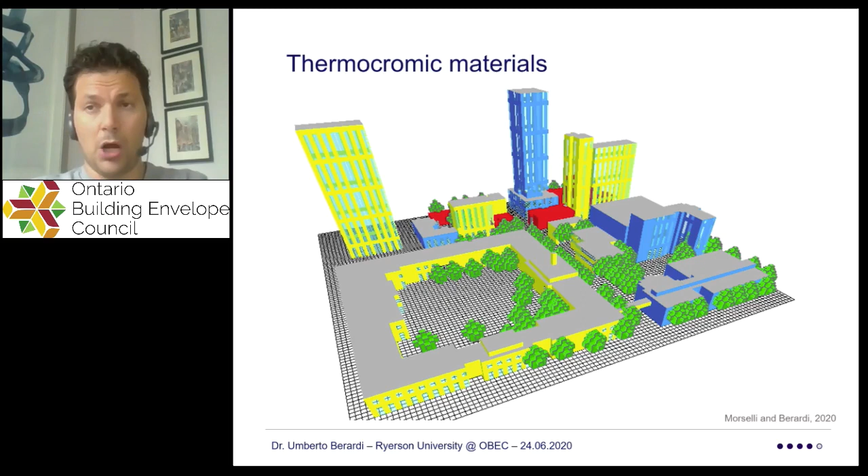So here you see a recent publication of a PhD student of mine, Shahrzad Soudian, and she has been working on thermochromic coatings and a bunch of these products and pigments for facade application. I need to confess we still have some extra research to do to come to a fully explored value of these coatings, but there is definitely a lot of value in these products. In fact, we are ready now to start a pilot project within the Ryerson campus, where we are painting a facade with a thermochromic element, and we are going to start monitoring how this material behaves in the real field.

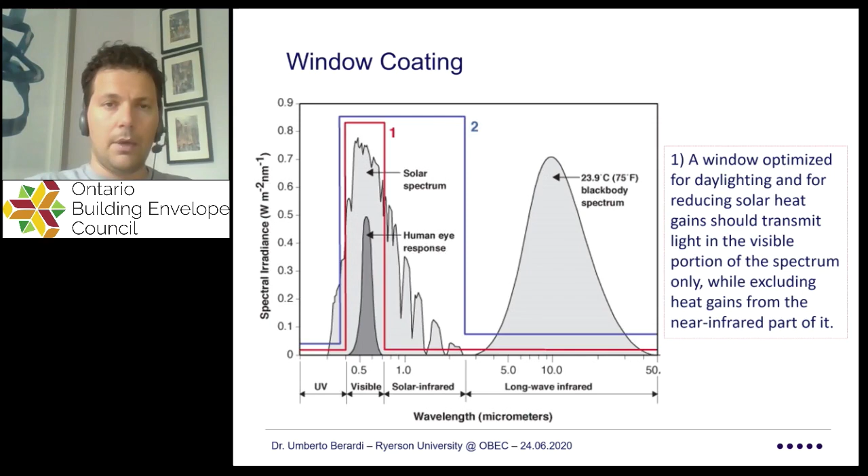Last but not least, over the last couple of minutes I'm going to describe a bit of high-performing coating for glasses. Specifically, since we don't have a lot of time, I'm going to focus on coatings that are low solar gain. These are already a valuable option not only for new glasses, but also for retrofitting your current windows, whenever you have the challenge of a facade gaining too much heat in the middle of the summer.

So clearly this requires understanding the implication of the light transmission that a glass has at different wavelengths. Typically you need to understand that we want a glass as transparent as possible into the visible range, so the range from 300 to 800 nanometers. We also often don't want transmission to occur in the infrared range, where a lot of it may arrive and may not be valuable, especially in an office building in the middle of the summer. So there are products these days, and here you see one of them.

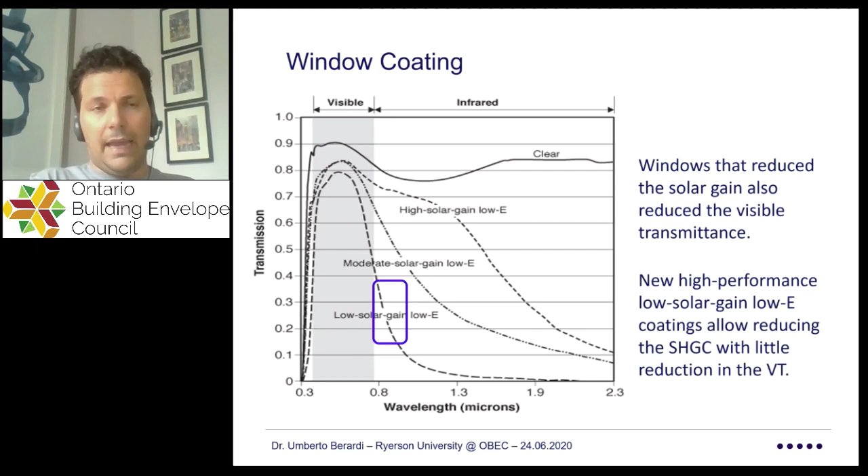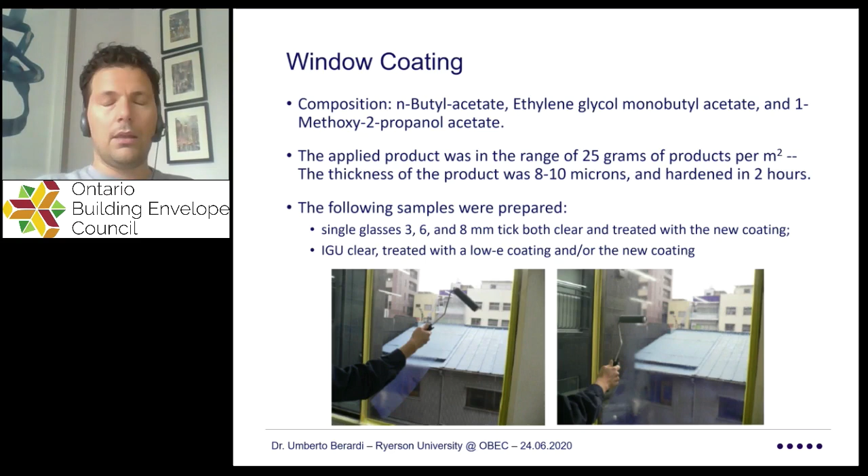They can be applied also in retrofitting. They're almost fully transparent. They can come as a kind of pellicola, or as a liquid coating to apply, that have the possibility of transitioning the transmission of your glasses. You can get a sense of this in a couple of papers that I'm going to mention at the end, in the references of this talk.

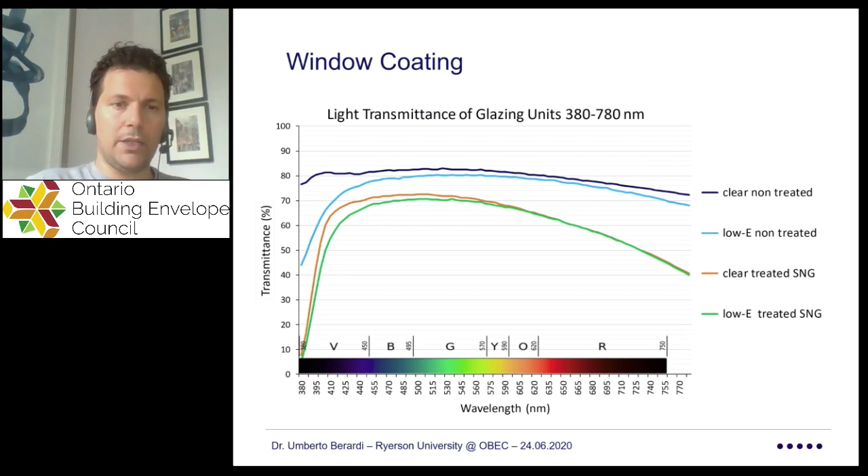But basically, these are coatings that are almost fully transparent into the middle of the visible range, so they still remain quite transparent. They don't have a lot of coloring, a bit of blue, not too much, as you can see in the range of 400 nanometers. But then, still with a very high color rendering index—so a perfect vision and perception of the outdoor—they have the opportunity to significantly cut the transmission of solar energy. From the condition of a clear glass, which basically allows your glass to bring inside your building over 80% of the incoming energy, into values that can be as low as 40% or even less than 40% of that incoming solar energy.

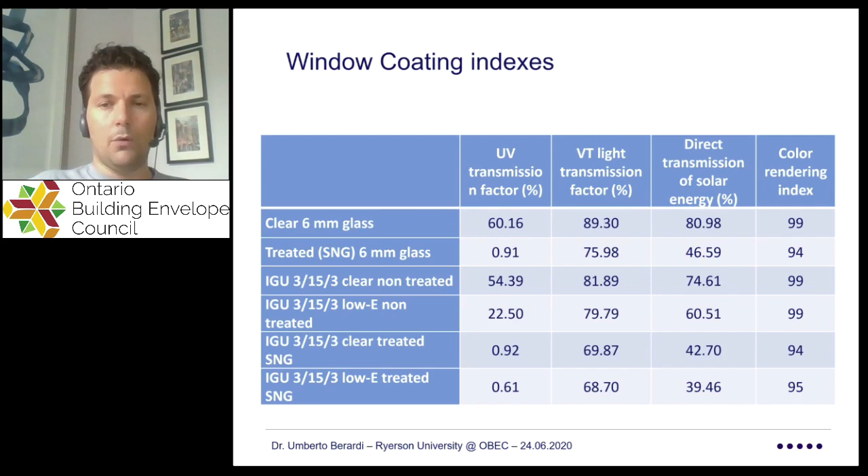So I hope I've tried to give you an overview, as much as possible in an hour, of a lot of new products. There is still a lot of work to do from our side in the research world when it comes to technology transfer, and definitely a lot of work to do when it comes to pilot projects for new facades. But we have a lot of new products, and many of them are very close to the market. As proof of that, we have also started showcasing some of these products, for example, in expos such as Construct Canada, just to give you the sense that these are products you can start considering for your next facade. I thank you for your attention, and I'm more than welcome to receive any question.